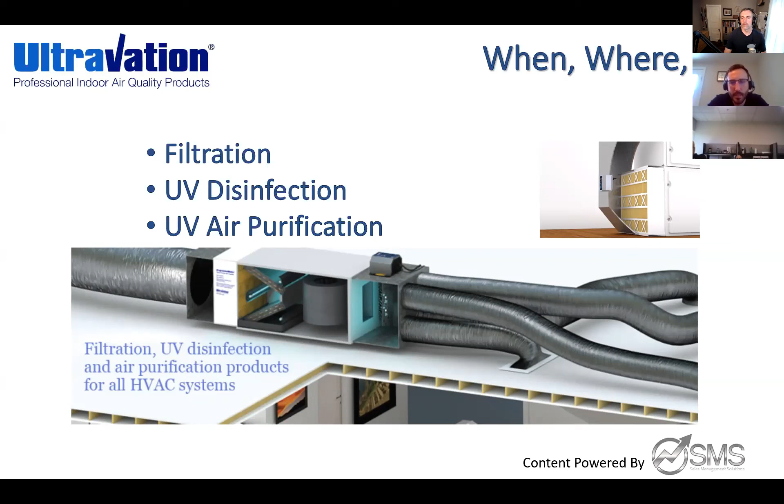Let's jump to the next. Now, our common IAQ technologies include UVGI, PCO, and ionization. UVGI is something we're heavily focusing on right now because that's what ASHRAE recommends to kill bacteria and viruses, so we really want to hammer home what that is and get a good understanding of it.

Ultraviolet germicidal irradiation is a disinfection method that uses short wavelength light, UVC, to kill or inactivate microorganisms. This occurs by destroying nucleic acids and disrupting their DNA, leaving them unable to perform vital cellular functions. So UVGI is only found in UVC lamps - that's our big takeaway and something to really remember as we go through this presentation. UVGI is the technology found in UVC lamps.

PCO is the next technology we want to talk about - that's photocatalytic oxidation. It's a very powerful process that combines UVC irradiation with a substance, a catalyst, titanium dioxide, also referred to as TiO2. This catalyst effect results in a reaction that breaks apart the cellular structure of pollutants. Next, Scott's going to bring up a video of one of our products using PCO, giving you a visual representation of PCO taking place.

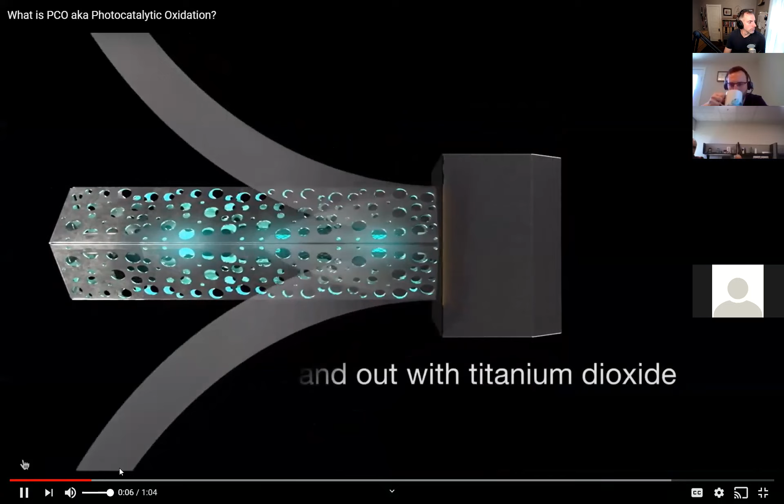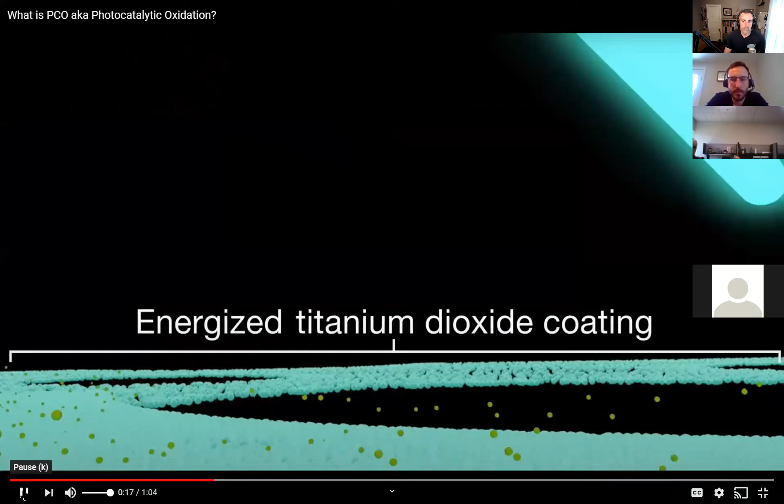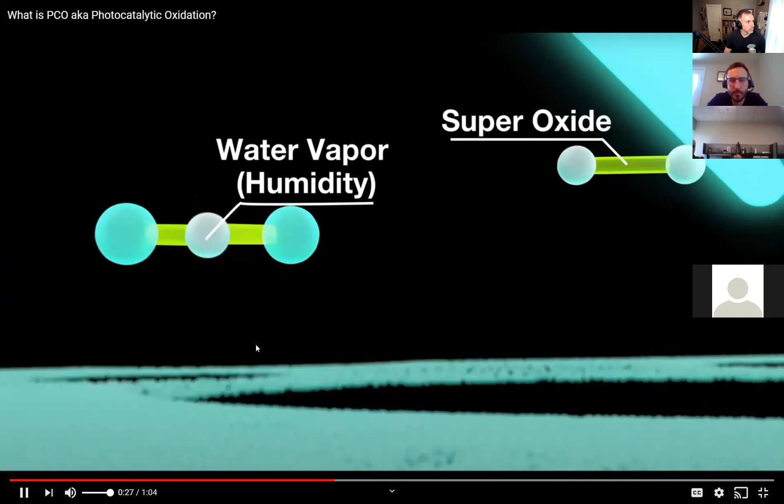The Advanced Oxidation module is coated with an exclusive titanium dioxide formulation. When UV light is applied to the surface, the titanium dioxide coating becomes energized, causing it to release electrons. The electrons then combine with oxygen to create superoxides. The titanium dioxide then collects replacement electrons from moisture in the air to become charged particles known as hydroxyl radicals. Together with the superoxides, a powerful photocatalytic oxidation, or PCO field, is created.

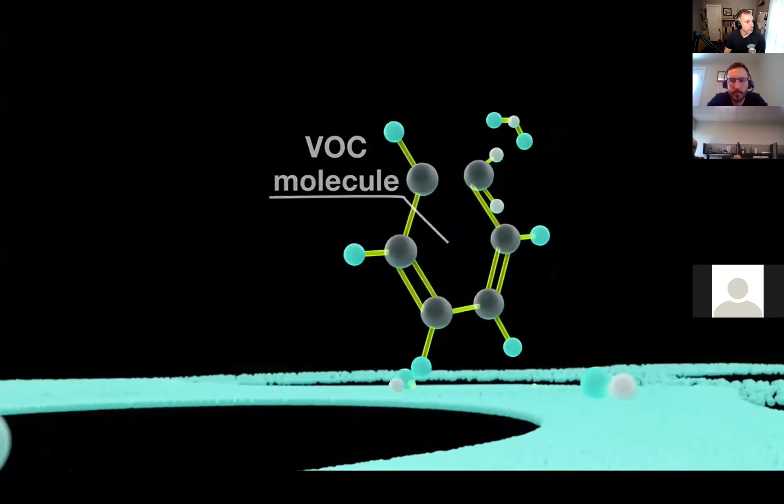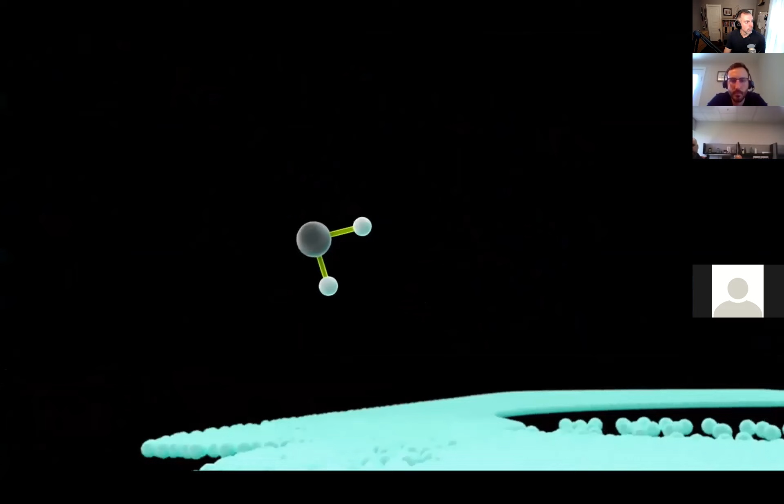As odors, germs, mold, and other VOC organic molecules approach the PCO field, they are disassembled as the oxidizers pull electrons from them. The purification process is completed, with the remaining molecules recombining to form simple water vapor and trace amounts of carbon dioxide.

Ultravation's advanced oxidation process.

One of the cool things about PCO, especially when talking to contractors and contractors are speaking to their customers, is that PCO, when it reacts with UVC lamps, is killing bacteria and viruses. One of the cool things that happens when PCO is activated is it does kill VOCs, which eliminates odors inside households, so it's a great way to reduce the smells commonly found in different people's homes.

Ionization is the third technology we're going to talk about, found in our Orion product and our Solaris product. Ionization is what happens when molecules are electrically charged by generating negative ions using electricity and discharging them. These negative ions attach to positively charged particles and trigger a bond to create denser particles.

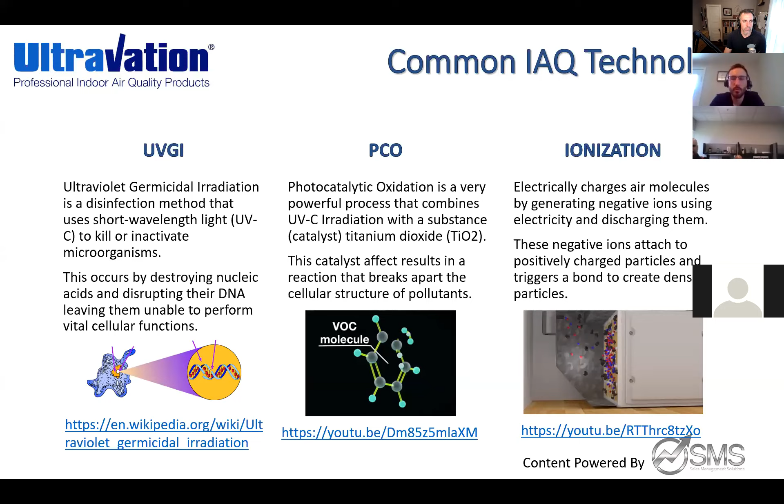In this next video, it's going to show our Orion working, to give you a visual representation of that.

Basically what's happening when our Orion is working is it's taking a filter, whether you have a 1-inch filter you just bought from a hardware store, or if you're using a more advanced filter like a MERV 11 or MERV 13, and it's making that filter a lot more enhanced.

It's taking bacteria, viruses, allergens, and different things like that, electrically charging them, and clumping them up, allowing them to be caught in your filter. Some of these filters are really nice and catch a lot, but no filter on the market is going to catch everything without restricting airflow. So this enhances that by clumping up these particles, allowing them to be caught in the filter.

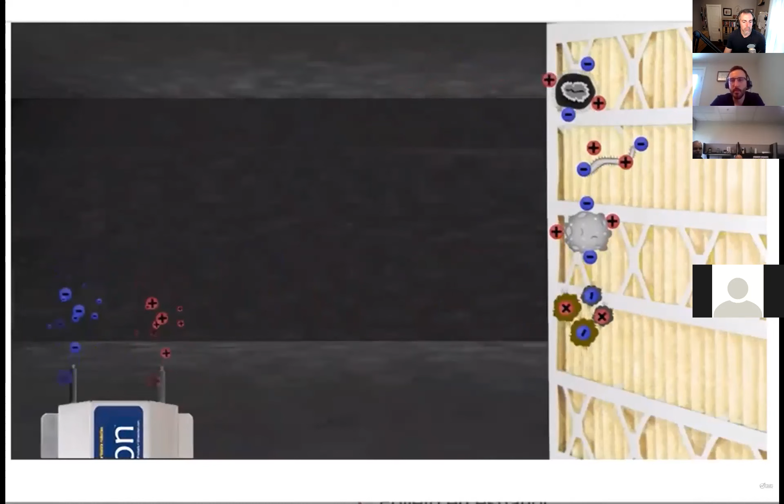Go ahead and jump to the next slide.

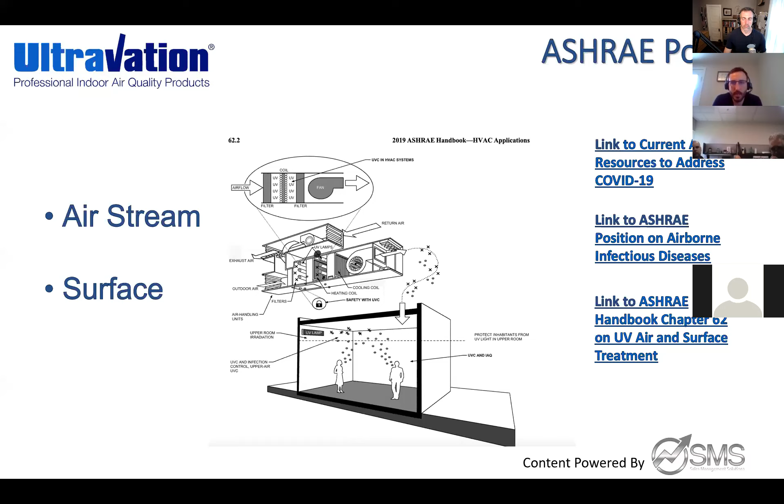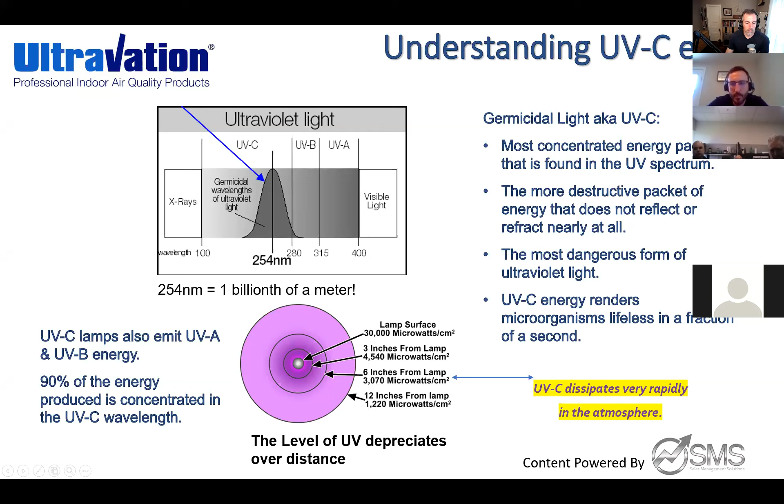Go ahead and jump to the next.

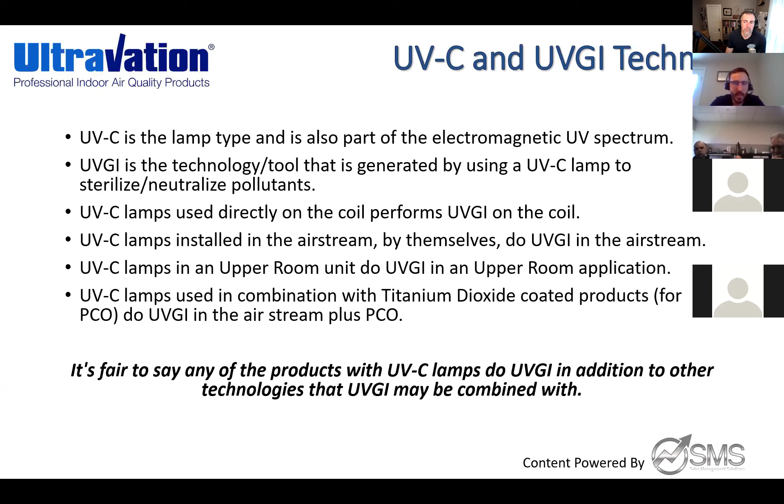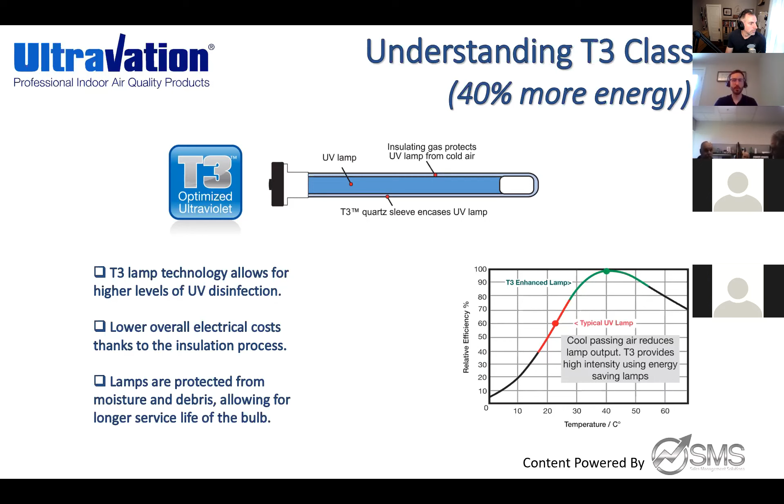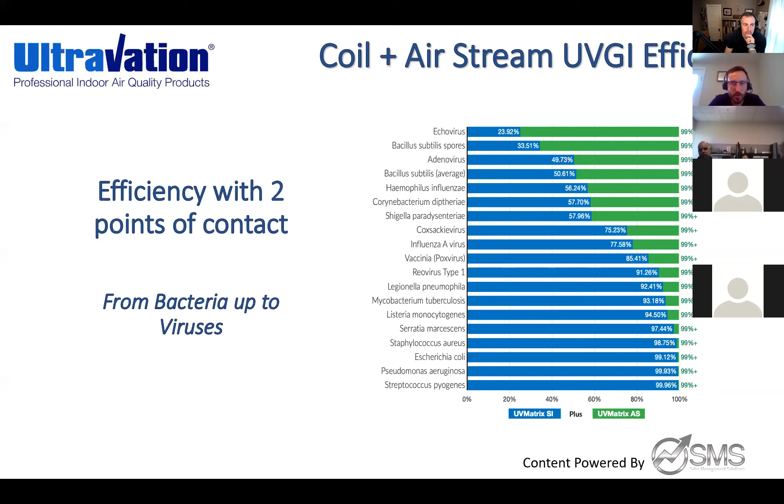Now if you go all the way down to the bottom, and they want to treat Streptococcus, they can treat just the coil and get almost 100% efficiency without worrying about treating the airstream. That's why it's always important to ask what they're trying to solve for. But most of this is a combination of the airstream and the coil to disinfect, especially when you're doing a specific type of virus or bacteria, or general maintenance of indoor air quality. So you always have to ask what you're trying to solve for, or is it just general disinfection? But we always recommend a combination of both.

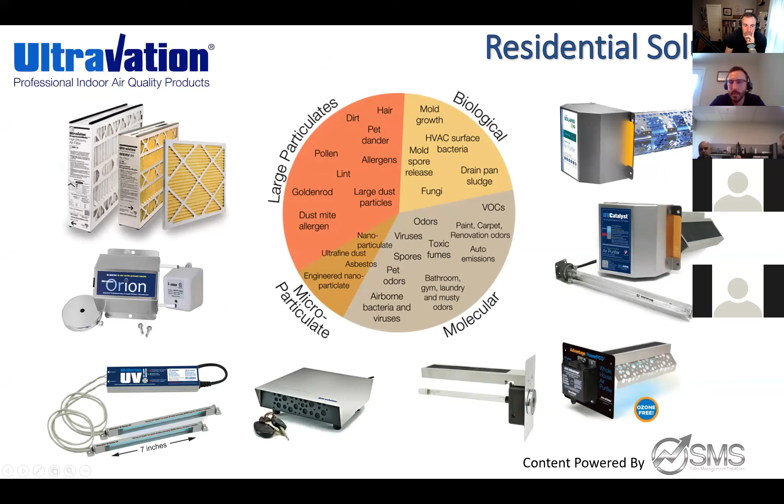So this is our coil recommendation application. This is what we recommend that you put over the coil if you're just wanting to put one UVC lamp over your coil. It's the UVC Advantage. This is also a great product for an entry-level person that just wants to get started with IAQ, that doesn't want to spend a lot of money. This is going to be a great product for these guys.

It does do germicidal UV to disinfect wet coils and inhibit allergens. You have the ability to put in a UVC lamp with a 1 or 2 year lamp life, depending if you go with the standard UVC lamp or the T3 lamp. You can get a 12 or 17-inch lamp, but you also have the option to add the PCO to remove odor. That little module right above the UVC lamp is your carbon PCO module. It's a separate SKU as an add-on that helps eliminate odors.

This is going to be an option if you just want to add an extra lamp or just one lamp over your coils. I did have a question the other day, can you put this in the Airstream? Technically, yes, but we have better products you could or should put in your Airstream. If you're doing a very, very small square footage, you could get away with something like this. I've had guys, because they like the throwaway design, just throw a couple in and daisy chain them.

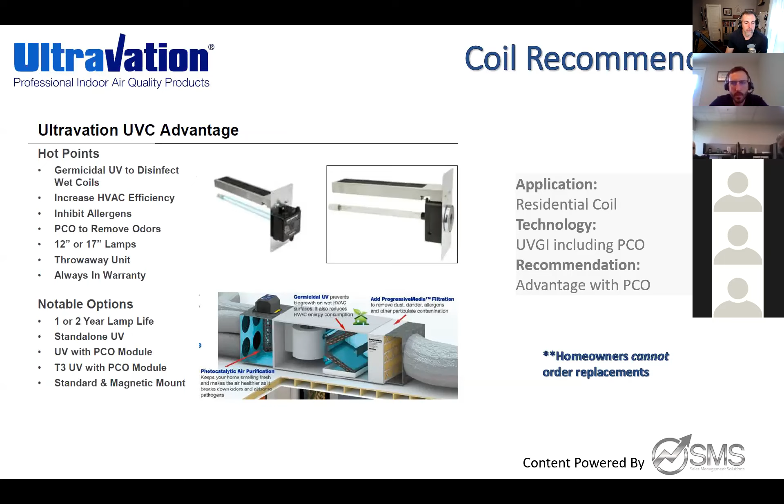This goes for all of our products: homeowners cannot order replacements. We sell direct to wholesalers, never to contractors or homeowners. And Ron, do we need the power PCO, or should I skip past that? You can skip past the power PCO.

Coil recommendation: this is our Ultravation UltraMAX EZUV Signature Series. This does have a lifetime warranty on it. This is going to be perfect for applications where you want to add more than one coil lamp. This does have the T3 bulb on it as well, 12 or 17-inch EZ-Light for the coils. This is different from the Advantage we just spoke about because you can add multiple lamps to this. The other one is kind of the throwaway unit, while this one has a more enhanced bulb, and you do replace the bulbs - this isn't a throwaway unit.

You keep that power pack and replace the bulbs. The power pack has a lifetime warranty. Bulbs have a 2-year warranty and lamp life. That connects directly to home wiring. Models are available for 24, 110, or 240 VAC for operation as well. This is going to be really good if you have a bigger coil that you want to add multiple lamps to as well.

Another important note is why it's so easy: when you add the accessory lamp, there's a Y jack. The reason that power pack is nicer than the Advantage is it's lifetime warranty and has built-in lamp monitoring. When you move up in tech, you get better bells and whistles, that's why it's lifetime warranted.

From a wiring standpoint, my contractor only had to tap power once off the furnace to power the main SS unit, then add on the accessory lamp. We did that because I had a very small N coil, and it was hard to fit. A coil's not so hard, but an N coil is a bit more tight on my unit. I have less than 2 tons needed in this house from 1910, so doing this design was nice for me.

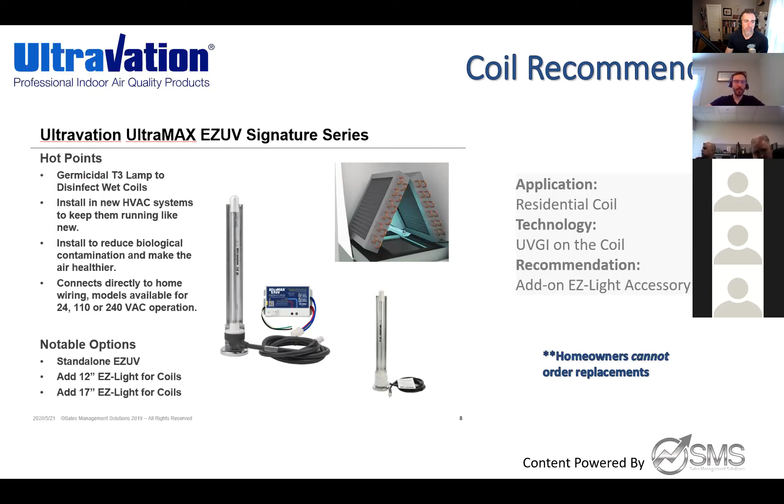At the beginning of the presentation we showed a full house installation. If you want to go all out on a system and add 3 coil lamps, say you have a Solaris or a Catalyst installed in the Airstream, both have the ability to plug in a coil lamp, as you see here, into the Catalyst, going over to the coils. Then you could add the EZUV we just spoke about, so you can have 3 coil lamps over your coils. That's if you want to go all out on a system.

I have this installed in my house too, but I didn't add the 3rd bulb. I've got plenty of coverage on the coil, it's clean, it's good. But if I wanted to throw a 3rd one on there, I could just plug it right into the Catalyst power head and add some more tech. So Scott has that upgrade option if he wants it, but this is going to be one of the products we highly recommend for residential Airstream.

This is going to be our whole house odor reduction, house purification, activated carbon PCO, self-recharging carbon for 10 years, and it does have that lamp monitoring system as well. You can use this as a standalone system like Scott does in his house, but you put it right into the Airstream there. It does have the UVGI technology and it does have the PCO on it.

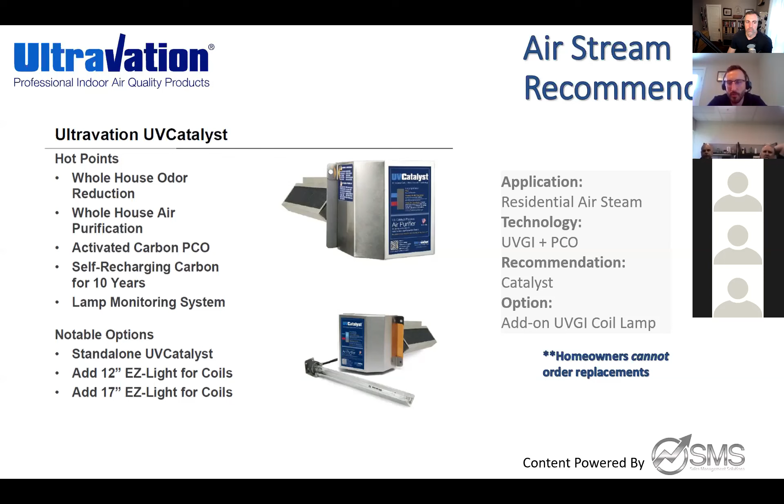It does have the option to add a 12 or 17-inch EZ-Light for the coils as well. So you wire this into your system, and then you have the option to plug an extra UVC lamp into this model that goes over your coils as well. But this is something that becomes highly recommended by us. Scott uses it in his house.

And then we do have this Solaris. This is our beefiest product here. It has all the technology we put into our products into one. So this is going to have PCO, ionization, and UVGI technology all wrapped up into one. If having a little bit of ozone is not a problem for your customers, which it isn't with most people, and even if it is, you do have the ability to turn it down on this product.

This is our beefiest product. You do have the option to add the 12 or 17-inch EZ-Light for the coils on this one as well, and it does kill bacteria and viruses. It does have that thunderstorm fresh air feeling as well from the ionization process that takes place, and it does have a lifetime warranty on it as well. But this is a really cool product.

If you're looking for something to put into the Airstream and treat the coils, you're going to recommend this, or you're going to recommend the Catalyst. Those are your two products that you guys are really going to start off with when trying to outfit a residential situation.

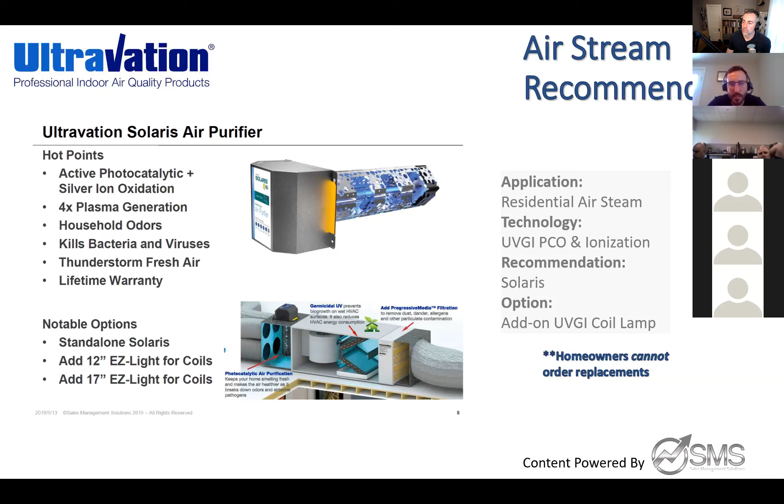So we can look at the competitive analysis if you guys are coming up against REME HALO. We can bring that up and I'll go through it real quick and hit on some of the points that you guys might come up against that might make sense. I won't go through the entire thing, I can send you guys this in a follow-up email, which I think I've sent most of you anyway. Some of the questions I think you guys might get, I'll hit on real quick.

What were the names of some of the competitors? REME HALO is going to be a big one, and then APCO is the other one.

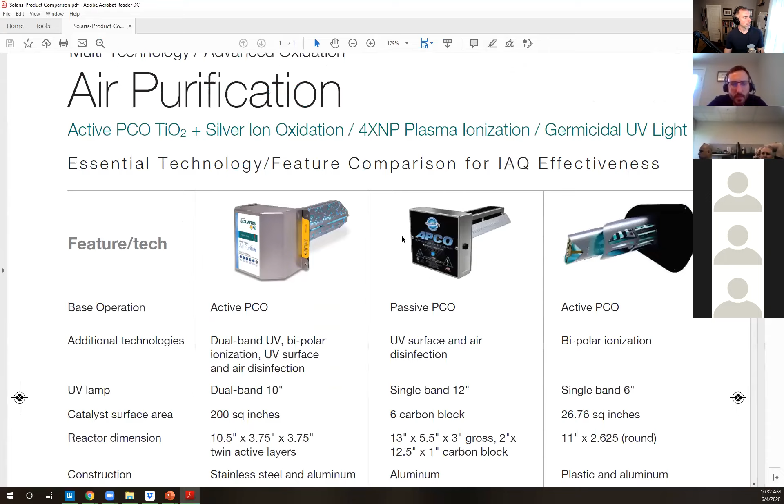So really what I want to focus on is our reactor dimension and catalyst surface area, a greater surface area to do PCO. Our UV lamp is a dual band 10-inch, theirs is a single band 6-inch. So the REME HALO is all the way to the right, ours is on the left, just so you guys know what we're looking at here.

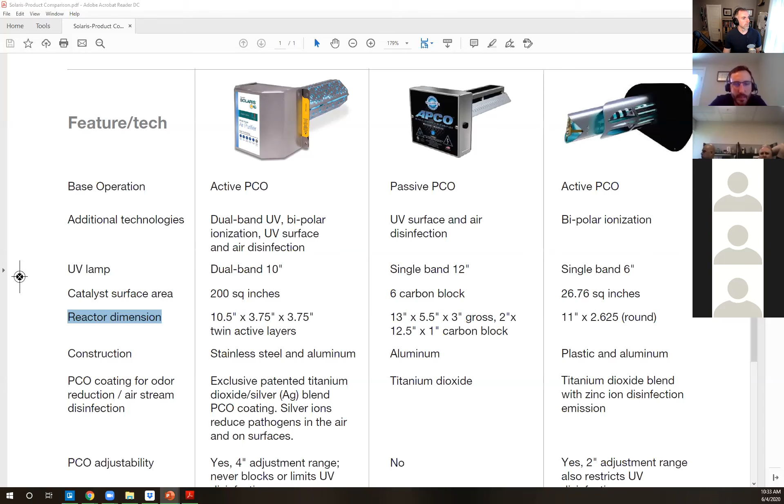Construction, ours is stainless steel and aluminum. Theirs is plastic and aluminum.

PCO adjustability is another big one. This is when that ozone kind of takes into play and people might be a little bit sensitive to it. So if people do become sensitive to it in their house, you do have that adjustment range. You can crank it up if you want, and if they want you to come back and turn it down a little bit, you can turn it down. We have a 4-inch adjustment range where they only have a 2-inch adjustment range. And when you turn ours down, it does not limit our UV disinfection, but when you turn theirs down, it does restrict their UV disinfection. So we're still giving that UVGI technology even when you do adjust ours.

The other thing I wanted to talk about is expandability and warranty. We do have the expandability with the ability to plug in that extra lamp. So if you want to treat coils with ours as well as the airstream, you don't have to wire a completely different UV light to go over the coils, you just plug it into ours and mount it over the coils. Theirs does not have that ability to plug in an additional UV light to mount over the coils.

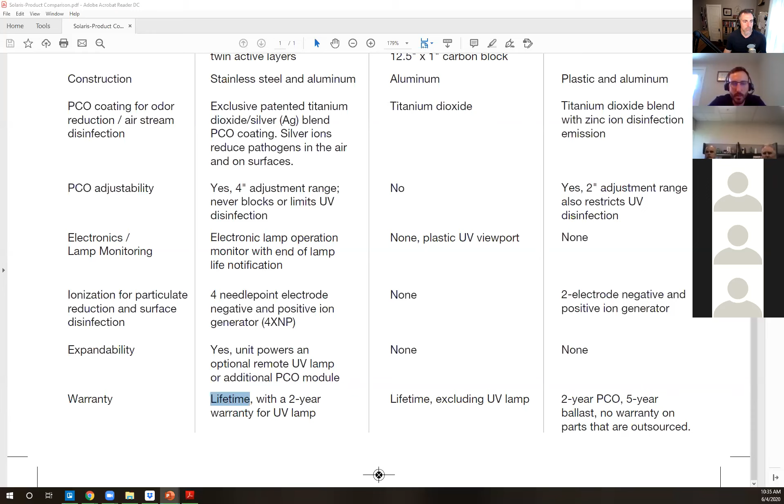And then warranty is another huge one. We have a lifetime warranty with a 2-year warranty for our UV lamp. Their warranty includes a 2-year on the PCO, 5-year ballast, and no warranty on parts that are outsourced. So I would say expandability, warranty, construction, and some of the additional technology are all huge key selling points when it comes to contractors and homeowners.

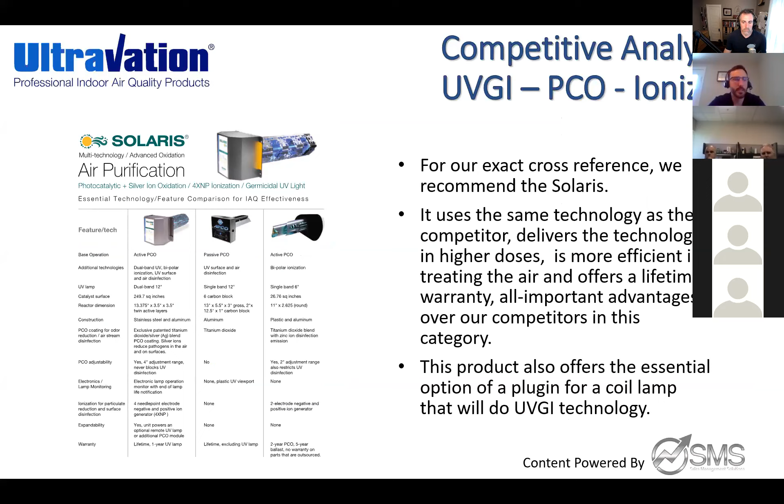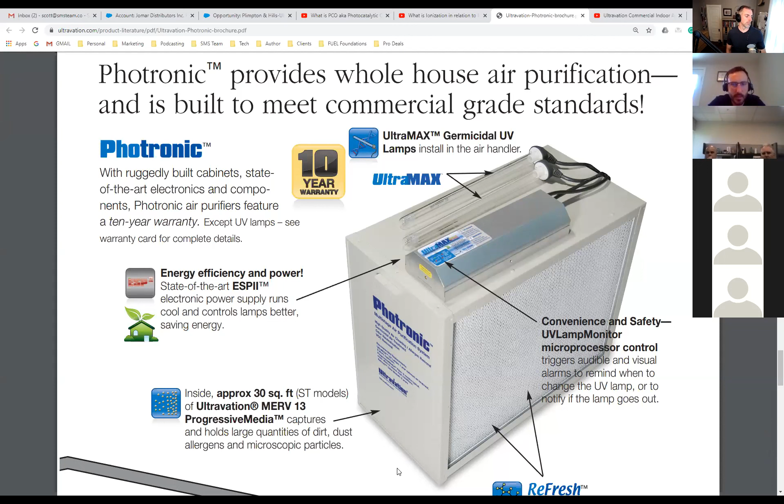Next, we're going to talk about the Photronic here. So this is our air filter that you guys brought in. It is a combination of an air filter mixed with UV technology, so you do get the UVGI technology, but you also get the air filtration as well. We have a MERV 13 filter in here, and you get the UVGI technology taking place inside the filter box as well.

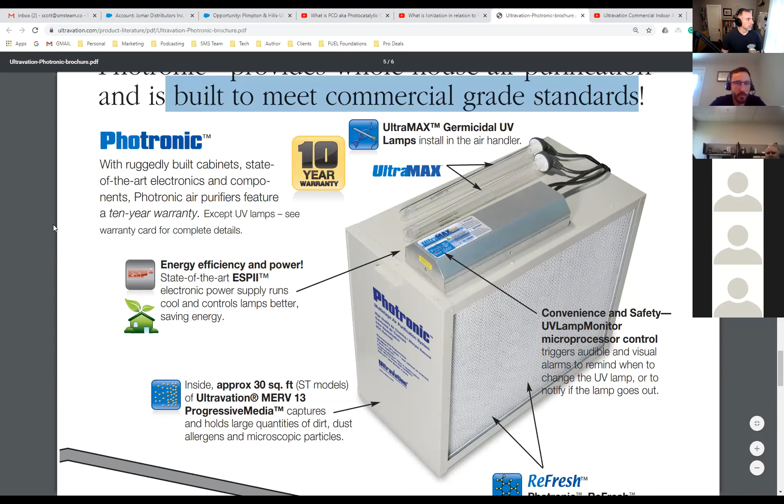So this is built to meet commercial grade standards as well, so you get commercial grade standards inside a residence. It's pretty neat to be able to do that, and you get that additional UVGI technology in a different area, not just in your airstream, not just in your coils, but you're even treating the air before it gets to those spots as well, which is another way to treat the air. The more area that you treat with UV, the better, and this is just another way that you can do this.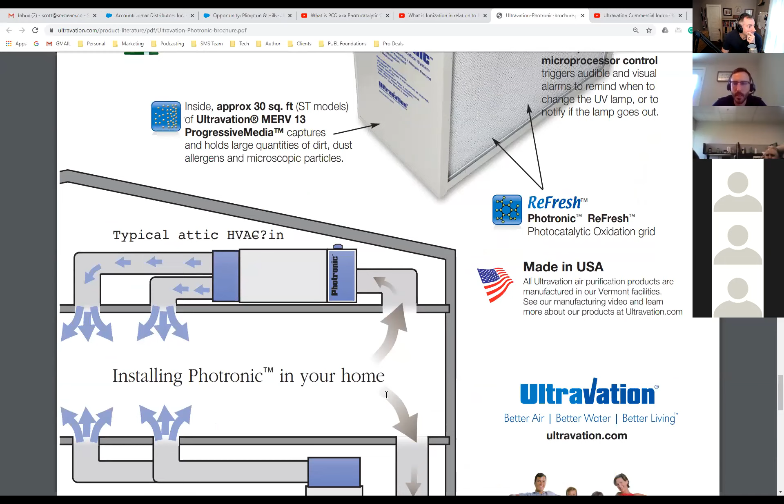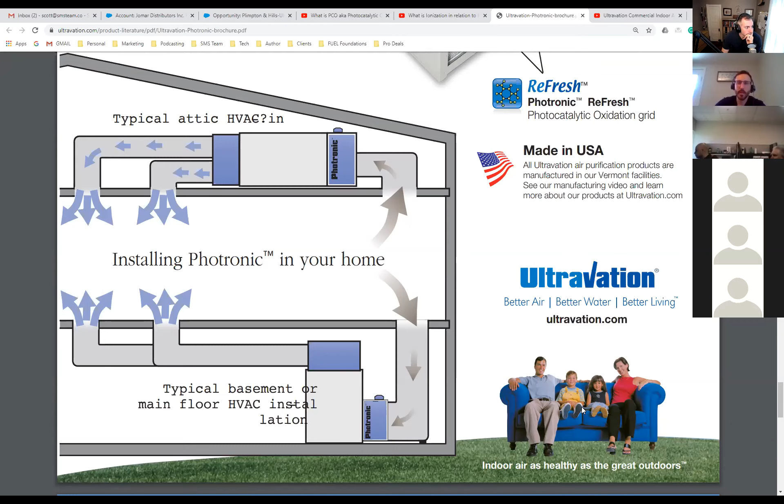This is by far a greater upgrade when it comes to indoor air quality. For me, I'm going to start off in the airstream with the catalyst, and if I don't mind the ozone, I'm going to start with the catalyst or the Solaris, then treat the coils, and then look for something like the Photronic or the Orion next. That way you can continually upgrade your system. And to be fair, you could just do the Photronic because it's scalable like the Catalyst and the Solaris.

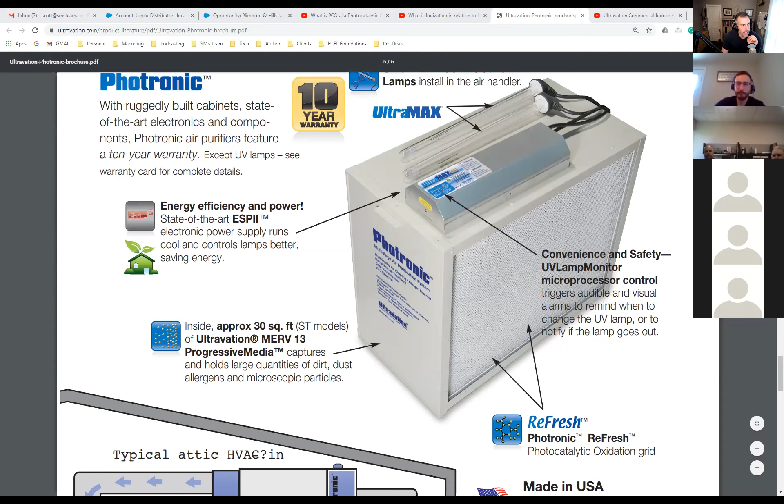As you can see here, there's the Ultramax add-on bulbs, so I could still plug in bulbs and put them over the coil. And then this screen here on the Photronic has the titanium dioxide on it, which is creating the PCO right out of the box. So we've got the filter first and then bulbs pointed at this screen to activate the PCO, so we're actually already creating PCO as the air is passing out of the filtering process.

So yes, you can still add all the other stuff on like Ron said, but to be fair, the reason why you guys brought this in is great. I could stick this right in, do my filter install, which should be step one in any IAQ, add on, piggyback on my coil lamps to take care of the coil. And then I've already got my PCO going on. And then if I still need more, as Ron said, then we could look at in-duct solutions.

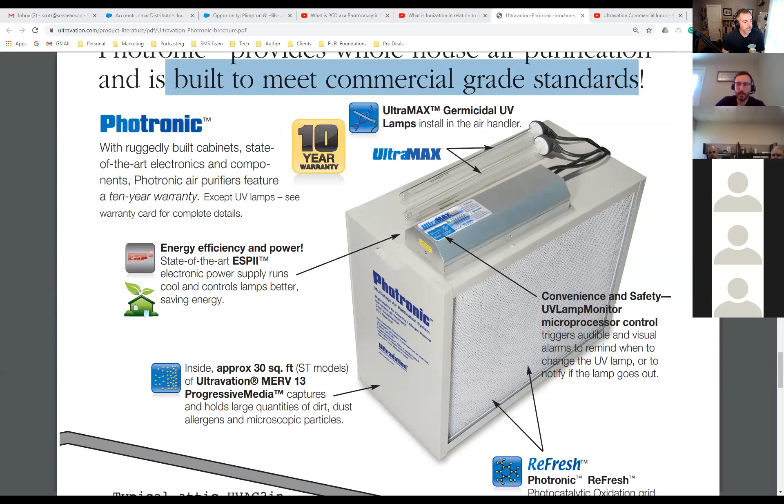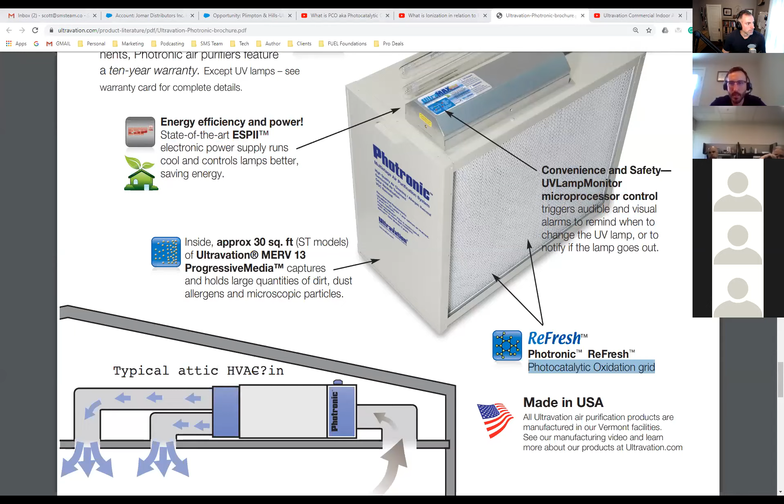Yeah, so you can continuously go above and beyond. It just depends how far people really want to go with this. You can continuously go down the rabbit hole when it comes to this. So it does come down to how far people want to go and how much they want to spend, but we can definitely upgrade. I think Ted had a customer that recently did one of these and did it kind of like a whole house filtration like that.

The portable air purifier, I think this is a great product. It does do spaces up to 500 square feet, controls odor, deactivates airborne bacteria, viruses, and allergens. It is a tabletop air purifier, 3 inches tall, I think it's a 9x7. You can put this on your counter, desktop install, offices, workshops, dorm rooms, personal gyms, locker rooms.

It's a plug and play option as well, so you don't have to worry about it being dangerous. You can put this right out on the counter, you plug it into a normal outlet. This is going to be, I think, a cool seller that you guys can put on your counters.

I think contractors would buy this for their own personal reasons, and I think this could be a cool product for those guys to sell as well when they're in different businesses, when they're in different people's houses as well. So I think this, along with the M series, is a great product, or two great products to have, especially displayed at the counter as well.

Sounds like this is what you guys can use in one of your offices right now, which is at the very end of your Airstream.

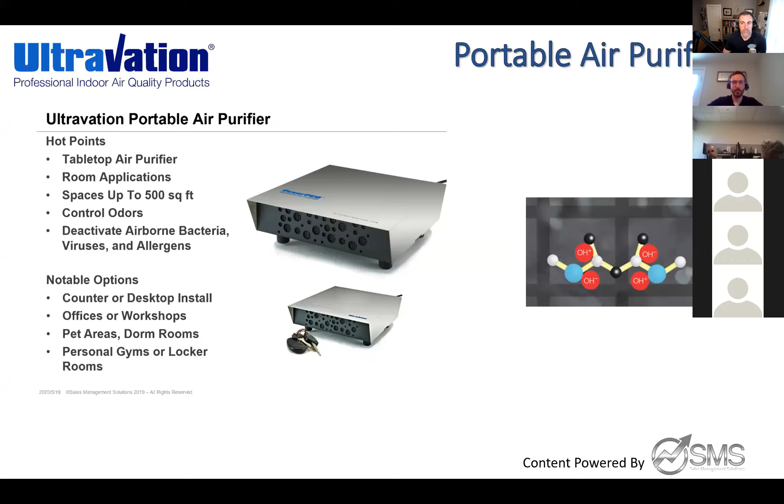Yeah, because you're always going to run into certain applications like that where you don't have rooms that have ductwork going to those, or even anywhere that has great filtration, or you're just going to have a room that stinks a little bit more than other rooms, laundry rooms, gyms, things like that, etc.

So if next you're all set. Next is our M series for UV ductless. This is another very popular product. This is our UVC lamps for our ductless solutions. This does do UVGI technology in mini splits.

I know there are some other products out there that do indoor air quality for mini splits, but they're not using UVGI technology. We are using UVGI technology, which we know that's what ASHRAE is recommending that we use, so that's what we're trying to adhere to.

So these do come with two 7-inch bulbs. You do have the choice to use one or two depending on your room or application. You do get that little power pack there that you can mount on the inside of the mini split if you do have room. If not, just mount it on the top where you can't see it.

You do have a 1-year lamp warranty on these, so you do need to replace these every year. Guys should be going to do their PMs on these every year anyway and cleaning out the blower wheel. These things get super nasty, whether you're in a restaurant, you're in an airport, if you're in somebody's house. After 6 months to a year, these things get really disgusting.

So people should be cleaning these out every year anyway. So it's definitely good to have some sort of disinfection on your coil anyway. And when guys are doing their yearly PMs on these, then just pop out the bulbs and replace them. They are pretty easy to disconnect to replace. It's kind of almost like a phone jack, how they plug into, like an old phone jack, how they plug into the little power pack there.

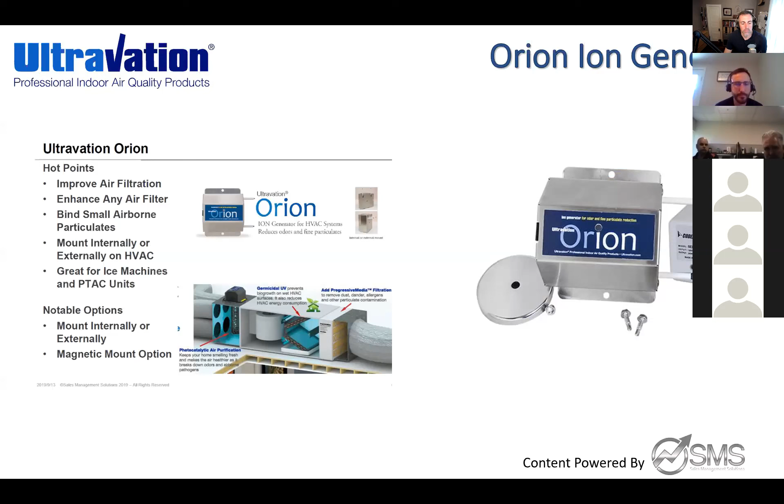We'll go ahead and jump to the next, the Orion here that mounts before the air filter. These are also great for ice machines and PTAC units as well. And like I said, they just electrically charge the particles in the air, and that basically enhances whatever type of air filter that you have in your filter box there. And to complete the system, I know we've spoken with you guys a little bit about this in the past, but these are some really neat boxes, and I'm sure you guys have seen the straight throughs.

I'm sure you've seen right angles before.

Something I did want to mention, we do have support boxes. I know some people make their own, but ours are heavily constructed and insulated, and all of our filter boxes come with filters inside them as well.

One or two cool things we do with our filter boxes: you can get them bare bones, just plain galvanized, but we can also paint these to the color of your system, so aesthetically they look really neat. We can also silkscreen print the name of the contractor on there, which is cool if you have a contractor buying a lot of filter boxes.

It's a really nice marketing piece for those guys too. When a homeowner walks past their system and sees that same name all the time, they know who to call when something goes wrong, or for cleanings, in the future.

I just want to note, this came up yesterday in the training I did. Guys forget that just like with lamps, not all lamps are created equal - like with our upgraded T3 design, same thing with our filters. We have the pressure graphs to back it up. We don't have pressure drop issues like a lot of other manufacturers. That's why many contractors have stopped at the MERV 8 level, but since we push IAQ, we only sell MERV 11, MERV 13 class filters.

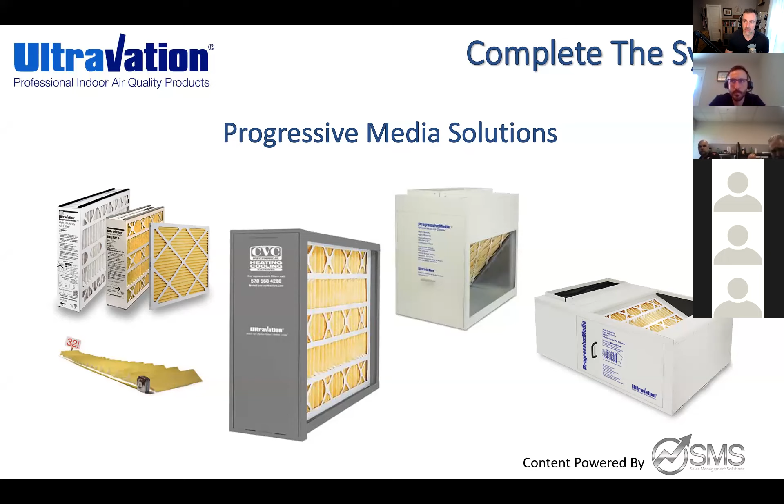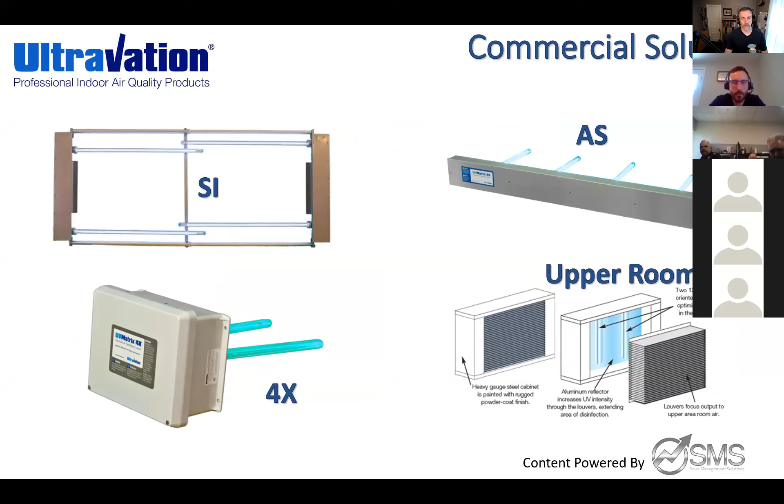So, commercial solutions - we have the SI, AS, 4X and the upper room, so we'll jump into those real quick. Coil and Airstream UVGI custom solutions - what are we trying to solve for?

That's an important question we always have to ask: what are we trying to solve for? Viruses, bacteria, or a combination of both? This is going to help us accurately recommend how many bulbs you need per coil, per Airstream.

We do have sizing guidelines I can send you guys as well. These are what you need to send to each of your contractors when they're inside a commercial job to fill out. It's an editable Excel form that they can go in and just put check marks on different things - they'll type in the measurements for the duct, for the coils.

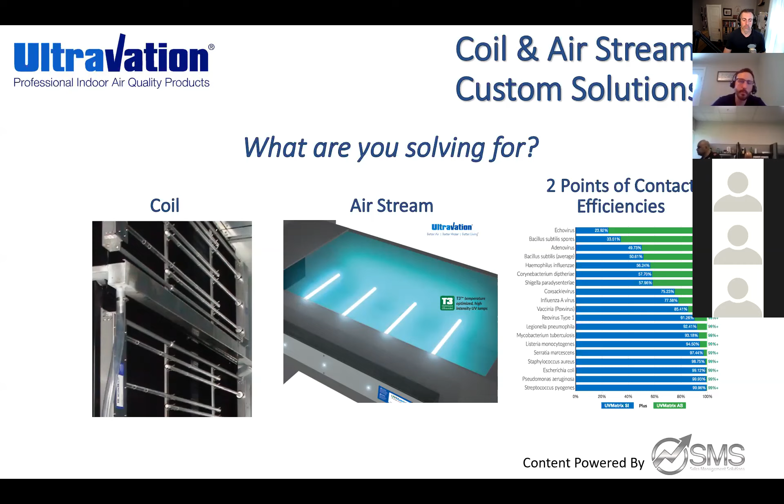They're going to write in their CFMs, say what they're trying to solve for, what they're trying to disinfect, and at what rate they're trying to disinfect for. So we'll have a good, better, best efficiency rate that we're trying to solve for as well.

Sometimes money does become a factor when trying to solve for different things. In our recommendations, we'll tell you: if you're trying to solve for 50% efficiency, you need 2 bulbs; 75% efficiency, you need 4 bulbs; 100% efficiency, you need 6 bulbs. That's just an example, but price point goes up with each of those. It really depends on what efficiency you're trying to look at.

So all that stuff comes into play. That's all laid out on the sizing guidelines I can send you guys, but it's very important when trying to get a quote for commercial stuff as well.

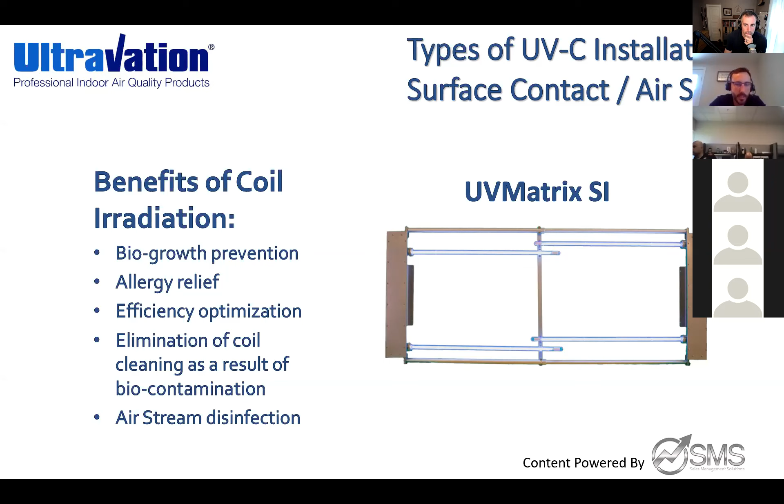So types of UV installation: surface contact and Airstream. Our SI is primarily used for coil treatment. You do get Airstream disinfection on this as well because air passes through. You get biogrowth prevention, allergy relief, efficiency optimization, and elimination of coil cleaning as a result of biocontamination and Airstream disinfection.

The UV Matrix 4X is really neat for rooftop package systems. It's very small, so it requires limited space. It has the NEMA 4X rated enclosure for outdoors, meaning it's weatherproof. It gives you biogrowth prevention, allergy relief, and elimination of coil cleaning as a result of biocontamination, and it's good for Airstream disinfection.

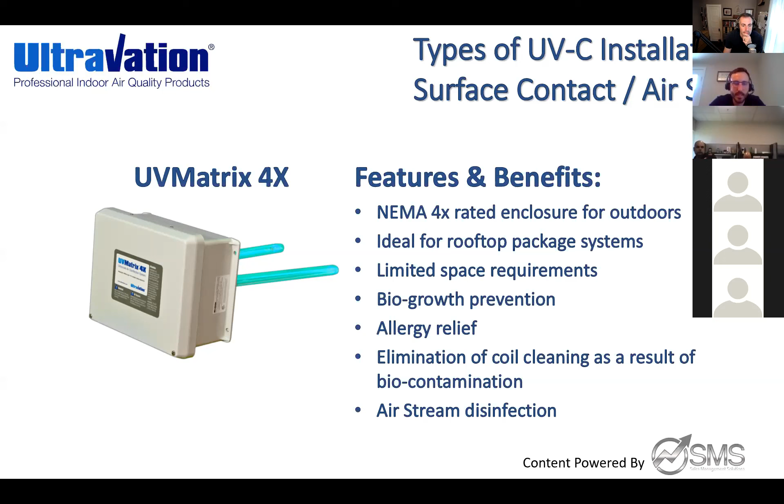UV Matrix AS, this is our airstream disinfection system, and this gives you improvement of indoor air quality through the reduction of airborne pathogens, allergy relief, and odor reduction due to biocontamination, also available with PCO photocatalyst.

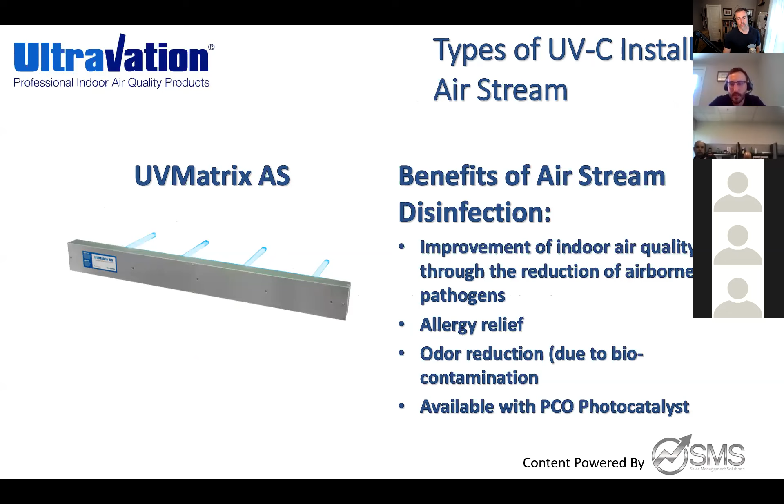This is a really neat product. It's very popular overseas, but it's becoming extremely popular here in the States over the past few weeks. This is our FS series.

One thing to always observe with this product is you do have to have a 7-foot minimum installation height. This is going to be another product that we request you let us know about when you're trying to buy it to solve for indoor air quality.

We like to recommend a certain amount of these per room. Each one is good up to about 250 square feet, so you can recommend as you go, but if you want us to help out, we definitely can. It isn't a one size fits all, so you typically do have to put multiple ones in per room. These come galvanized or white coated.

I'll read you the description: this is germicidal ultraviolet air disinfection for commercial and institutional applications. It destroys airborne pathogens by exposing the upper regions of the room only to germicidal UV light. As air naturally circulates in a room, all the air will be exposed to UV light, yet the design makes it possible for the room to be occupied during the disinfection process, which is ideal for reducing the risk of spreading infection while allowing continual air disinfection.

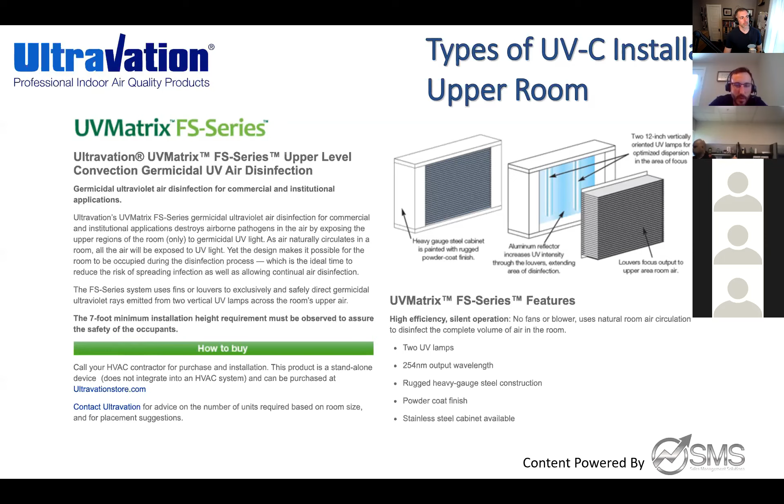Let's jump to the next slide. I'm going to share a new application sheet to give you an idea of how powerful this is for small environments. One second.

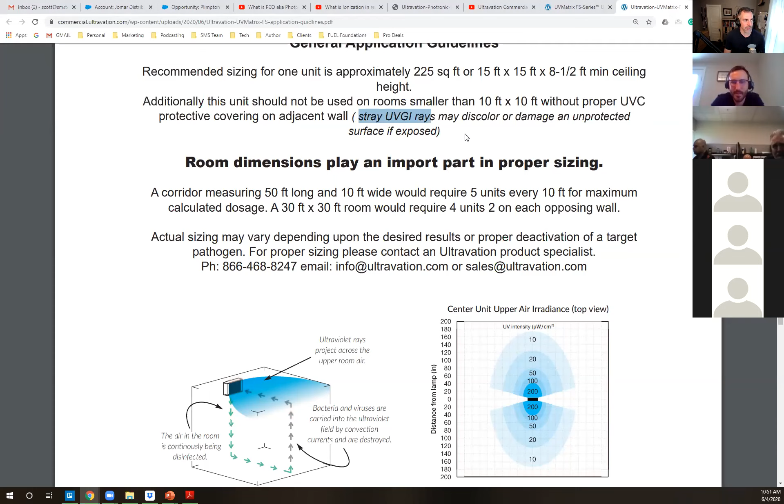Our concern is, if you try to put this in a 10-foot wide room, per the warning here, the rays coming across the top of the room may discolor or damage the wall at the opposite distance. Most people are not going to install this in a 10-foot by 10-foot room — I would just put in that UVP 6000 portable air purifier and be done with it for that small of a space.

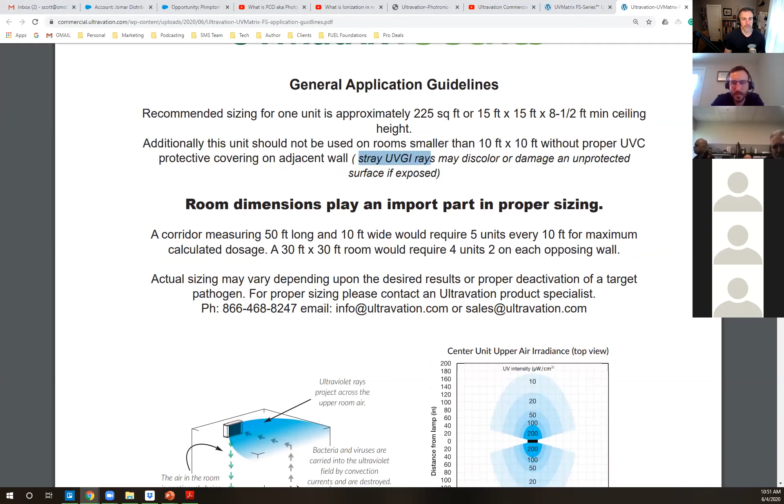Properly sized, it shouldn't eat the sheetrock. I think what you're going to get is discoloration more than anything if you put it in something smaller, but always adhere to it. When we say 7-foot height requirement, if you read into it like we just showed, it's an 8.5-foot ceiling requirement. So it's really from the bottom of the unit needs to be 7 foot. If you have an 8.5 feet ceiling requirement, that should give you that 7-foot clearance. Again, these boxes aren't big.

Is it discoloration from the convection bringing dirt up or from the actual UV? It's, again, UVC is the most potent form of UV light and destructive. So that's literally the UV that could be left unchecked in that small of an environment. It could literally change the color of the paint. That's why we don't go that small.

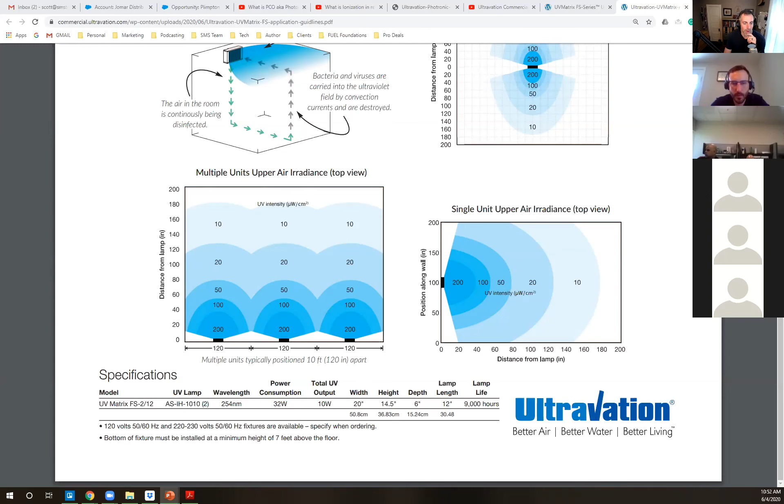So this share right now, you're showing 3 boxes across, a very wide open room here. This is meant for commercial wide open spaces. That's why it's a minimum of 225 square feet. Per the top of the application guidelines here, you need at least a 15 by 15 foot room with a 7 foot to 8.5 foot ceiling height to fit the box up that high.

So yeah, perfect for offices, like you said. Yeah, if you got a big office. Yeah, if you have a big enough office, absolutely. Big open office. These are going to be really good for restaurants, really good for schools, different facilities like that. I've even seen it used in places like prisons, even places that are wide open that do have the height requirements, the width requirements. As long as you have the room, then absolutely, these things are great.

Per Chapter 62 of the ASHRAE guidelines, they actually did discuss this heavily in there as part of the highlights, and they reflect on the fact this has been used over the years in wide open hospital hallways. You've got it in cafeterias, again, like wide open lobbies. There's a lot of grandiose spaces, like when you walk into these big hospital entrances and stuff like that, that this would be very effective in.